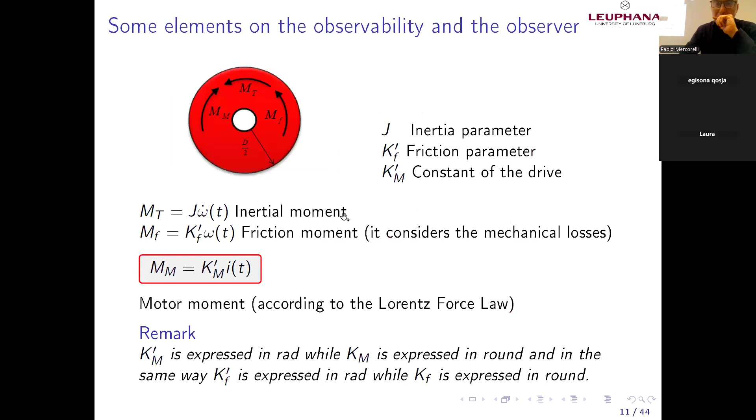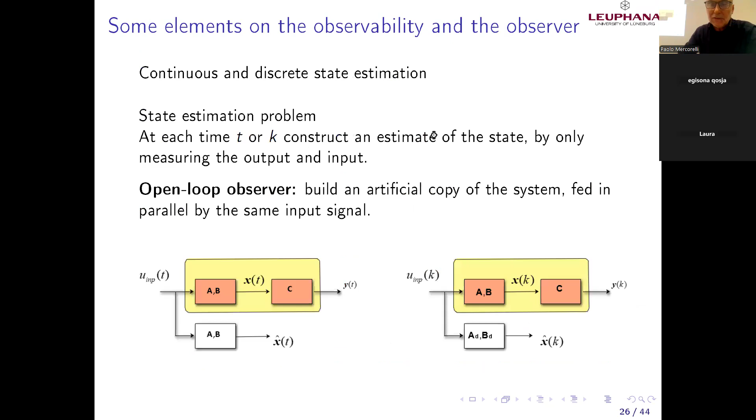Okay, until now basically we have seen many things: observability, observer, and we applied in a practical way, I would like to say, or better to say we implemented an interesting observer, which is, let me say, the first attempt to implement the observation using an observer. The name is Luenberger observer. Luenberger is an emeritus professor in LA, Los Angeles. I think he's still there.

Do you remember I told you these mathematical issues are not extremely important in this course, but I try to give you more feeling in order to understand at least what MATLAB does. Just a few words about nonlinear observability. At this moment what I am telling you is really abstract. I will come back later.

If the system is nonlinear, it means again that I cannot separate causes and effects. This means that states and input, for instance, are somehow mixed together. We will see a little bit in detail when I have the possibility to do an exercise later in the context of nonlinear systems. Nevertheless, the nonlinearity aspect is important because reality very often is not so linear, and the linear model is not enough.

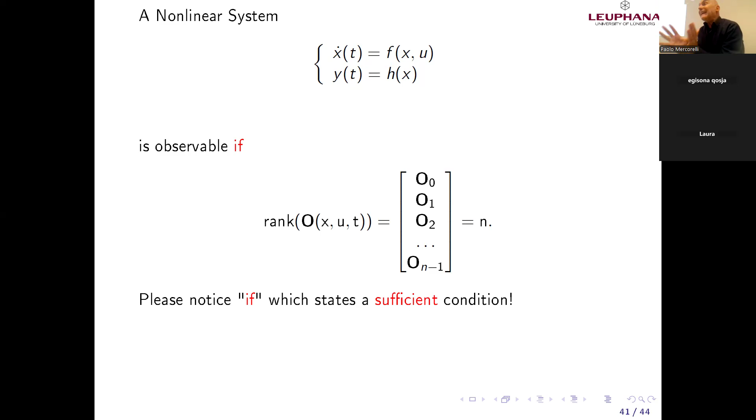But also the problem could be, now I'll show you, if the model does not reflect exactly the reality. I will be a little bit more concrete on this point using, again, an equation very shortly. Do you remember here? I was able, and now I will repeat again, to obtain this equation here, which is the error dynamics between what? Do you remember? X minus x hat is the error between what is true and what I estimate. This is the error dynamics because it's how the error changes, the derivative of the error, as a function of an expression.

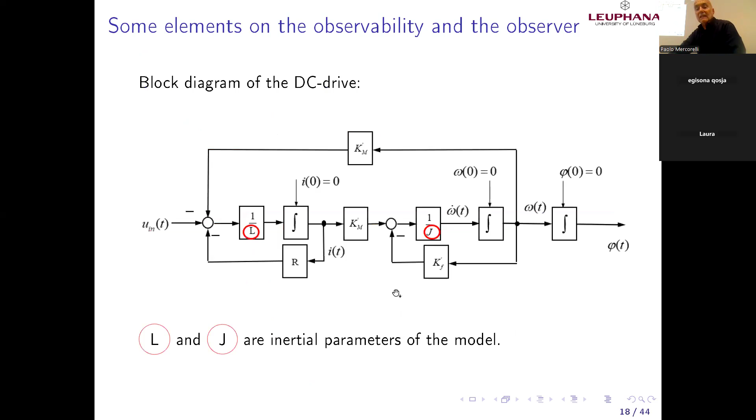But the assumption here is that the representation of my model using A, B, and C, but in particular using A and B, is perfect. I mean, I use the same A and B for the observer, which is this one, and for the system. But of course, this is an assumption. If you remember the simple example which I presented, the motor, for the engineer it is clear. I assume that the matrix A is perfectly known. This means I know the resistance of the coil, I know the inductance of the coil. This is not necessarily valid as an assumption because it's difficult to estimate or to know parameters.

This example here could also be used to understand what I intend. You remember, I built this with MATLAB. Now I open MATLAB to repeat. I assumed in the simulation I show you now that -1, which is the true value of the system I am considering, is exactly -1 also in the model. But it could also be -1.1, -1.2, because what I write in the computer to describe the reality does not necessarily reflect exactly the reality. Now, these two hypotheses, no uncertainty in the measurements, and that I know perfectly the parameters, roughly speaking the model, are not necessarily valid.

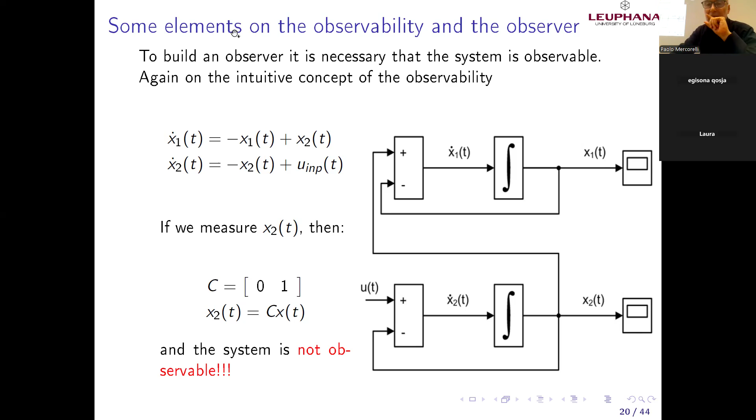Let me open again Luenberger in order to introduce Kalman, what Kalman can do for us, because last time I implemented the noise. Okay, let me open MATLAB. I cannot do that. Let me see if I'm able to open MATLAB from here.

From here, I'm sure. Yeah. Then I will share. 1 second. It should appear. Yeah. I think I have to share. No, no, this is not. Where is MATLAB? Ah, okay, excuse me. I didn't see. 1 second again. Yeah, okay. I think you should see the MATLAB. What is this? This is different. Something related to our project. 1 second. I look for the folder. Yeah, again for MATLAB.

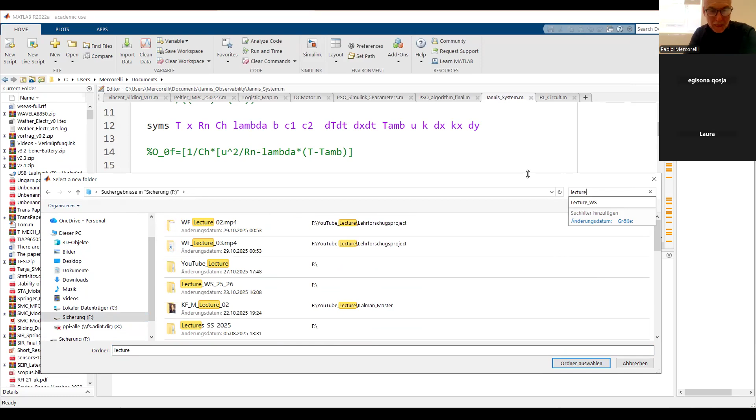We have the path, because the MATLAB I have here is basically a window of MATLAB. Here we can see the path where we are. Probably you know that from Windows. Now I'm looking for the folder where I have the software from last time. I don't need to explain what I am doing because this is a Windows structure. Let me see if I find it quickly. I think it should be here. Many things. But it's not here. Okay, found it.

What I would like to show you, the example was this one. Let me open. Look. Let me run. Now let me open the corresponding Simulink file. Let me repeat here the concept.

First of all, I would like to tell you again about what happened when I have noise. So we repeat what I did last time. And we can see, if you remember, that the estimation is not what we have seen without noise. This means, practically, the observer which I presented until now, this Luenberger observer, at least in this form here, could have some problems estimating a measured signal with noise.

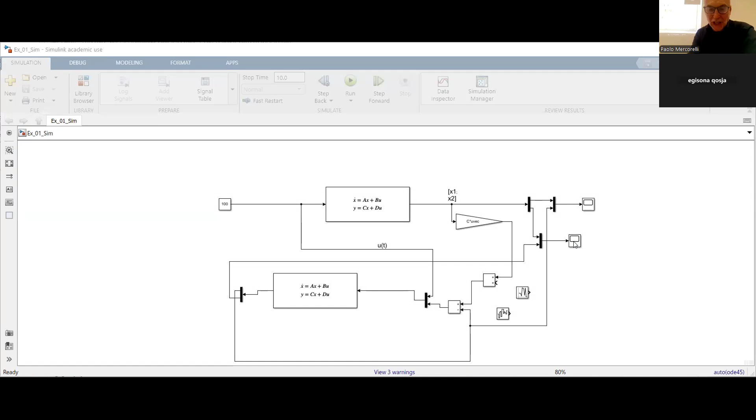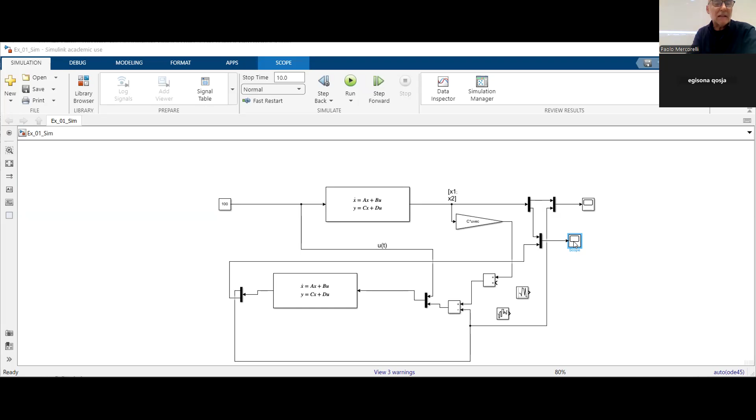Look what happens. Let me share. Okay, let me close this. Without noise, starting from different initial conditions. For instance, I would like to show you just the estimation of the second variable with the Luenberger observer. You can see, nevertheless, starting from different initial conditions,

after, as we discussed a lot, we can see that the observer is starting from 0. The real system is starting from -10. But after, I don't know, 0.6 seconds, it seems that we are quite satisfied, if we are satisfied. Again, it's an asymptotic observer. I told you about that.

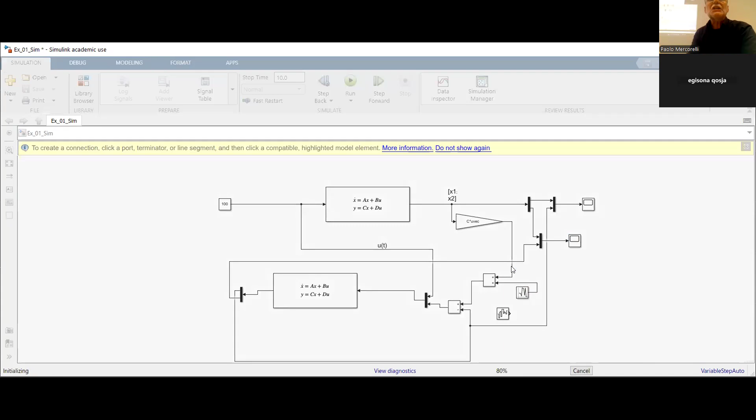Now, if I have noise in the measurements, where we concluded last time, look what happens. Noise means the measured data does not reflect the reality. Meaning, the signal here, which is the measured data, is not the true data.

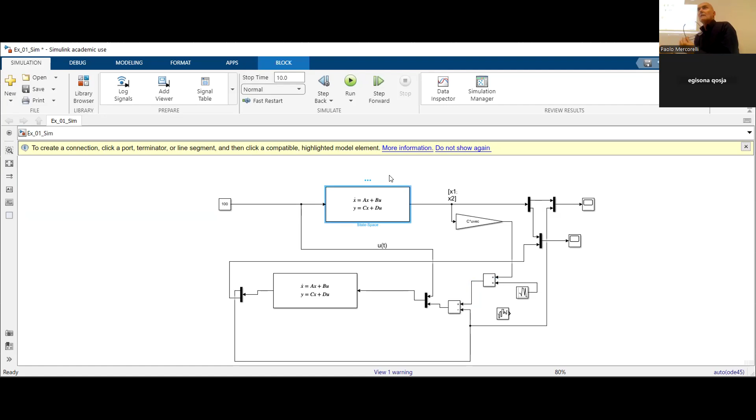Again, this is a very important concept. This is the real system, characterized by the matrix -1, 1, 0, -1, something like that. And here the observer. I can manipulate this as I want, but I cannot change this. I mean, I can simulate, try to imagine what happens using my physical knowledge, or an expert in, I don't know, population dynamics, because I'm not an expert in population dynamics. I'm not an expert in economy. I'm not an expert in sustainability.

Katharina Benz, if you look, Katharina, did you check Katharina Benz? No, don't do that, but you can.

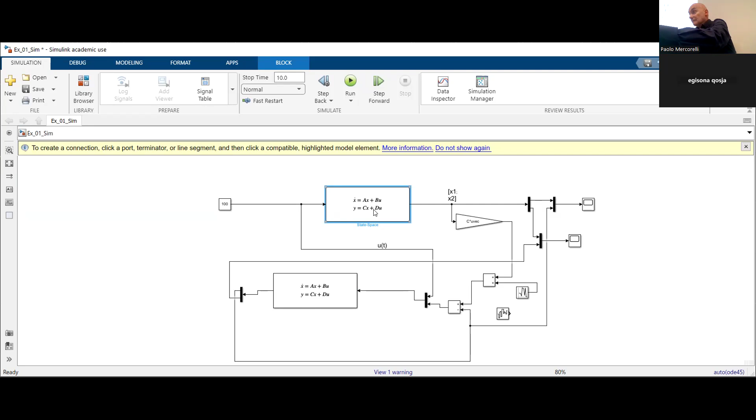Katharina Benz gave me the model, because she was an expert in the model of this dynamic between fish and fishers. Also, the two students in data science who were experts in internet data gave me the model. And then once I have the model, I can try to build an observer. But this is given. Even the people who are experts cannot say this is the truth. This is the model, at least in the simulation. The truth is not possible to know. And this is the point which I would like to emphasize.

Look now, if the measurements, the data, are affected by error, independently of whether I know the model or the system, better to say. The model reflects the real system. Look, of course, we can see that the estimation could be better. We will see that the Kalman filter can try to manage this problem. Of course, we can try different variations of the Luenberger observer, but the Kalman filter, if you want, is a variation of the Luenberger observer. We will see.

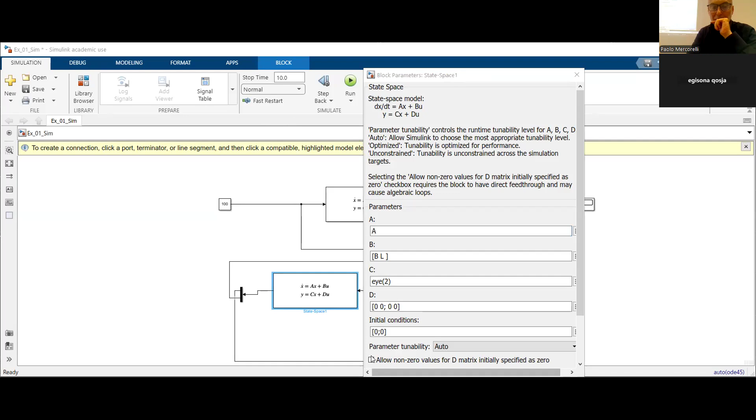Now, what happens if the model, which should reflect the real system, is not exactly known? Now we can understand this concept. Let me come back. Let me share, in order to show you what happens if, for instance, the matrix B with its parameters inside is different. Here the matrix B was, I think, 0, 1. Let me see quickly. The matrix B, look, 0, 1. Do you agree? The matrix B was 0, 1.

We can understand, for instance, if you consider the motor, the matrix B, which in this case is 0, 1, in the motor was 1 divided by L, 0. Do you remember? This means if I don't know L exactly, B of the observer is not B of the system. Now, coming back to this example, B of the observer could be, instead of 0, 1, let me exaggerate, 7, just to show you what happens. Of course, if it's close, we nevertheless have a difference, but it's not so big. But anyway, a difference, a bias.

We will see what the meaning of the bias is. This means I have an error in the data. It could happen. Not in the measured data, in the model. Instead of an inductance L of 1 millihenry in our model, we have 2 millihenry or 7 millihenry.

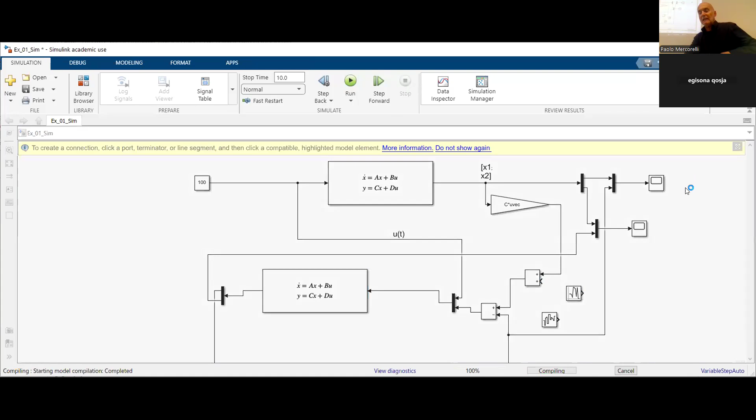Now here inside, we have a mismatch in the model. Not only, we have also noise here, but let me make more evident what happens if we have an error in the model. This means without error in the data, in the measured data. Let me see if it's evident what happens.

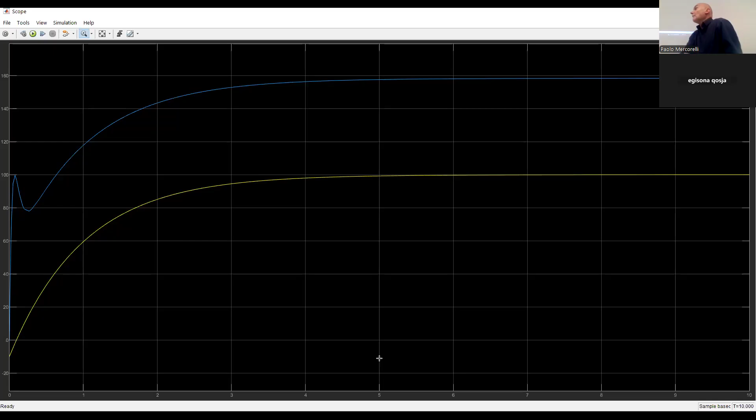Look. Now, of course, I exaggerate with 7, but just to show you that it could happen. Of course, if I write an error of 10%, it tells even a bias. Bias means, you know the word bias. We can see that the estimation now is absolutely not acceptable.

Because the real, the true, I can speak about the true. In the simulation, I can speak about the true, because I know what is, because I create the real model. This is important. In this sense, we can speak about the true and we validate, because this block here I create by myself. This means I know what is the truth.

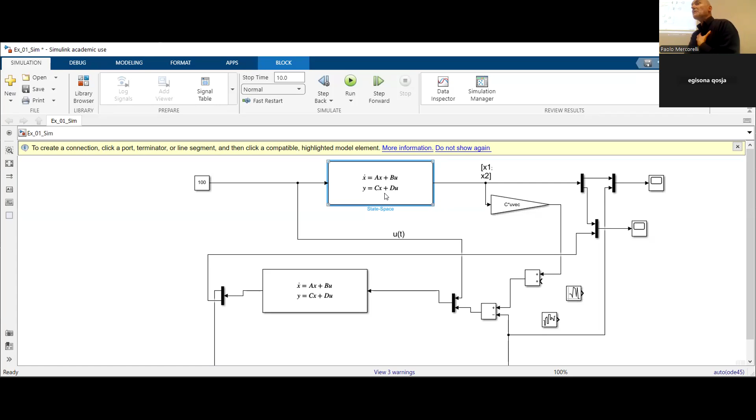Of course, in the real case, then this element here will disappear because I have to consider really the motor, the real motor. Of course, in the engineering fields, we need some element to interface the observer, which is in the microcontroller, with the real system. But this is for the engineer. In the bank, the real system very often is given directly by data, but in any case can be also modeled. But of course, in any case, you have always a mismatch between what is and what we imagine that is.

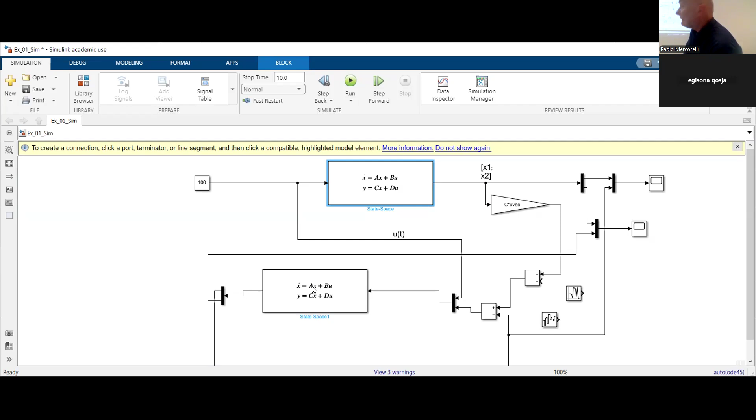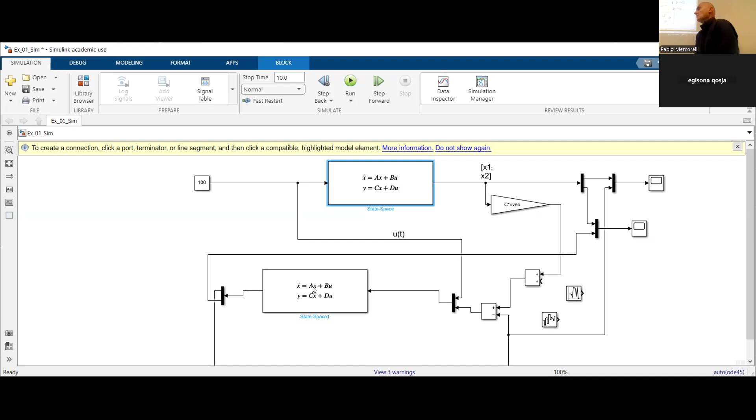Let me see if I can spend some words more about that. We can see that if I have an error, of course, if the error is small, we have a small bias, but the bias is there. I will converge asymptotically to a value which really is not the true value. If I don't have errors, I will converge, of course, asymptotically, but to the true values. If I add also this, of course, now we have some problems. More. Because you have bias and also the noise.

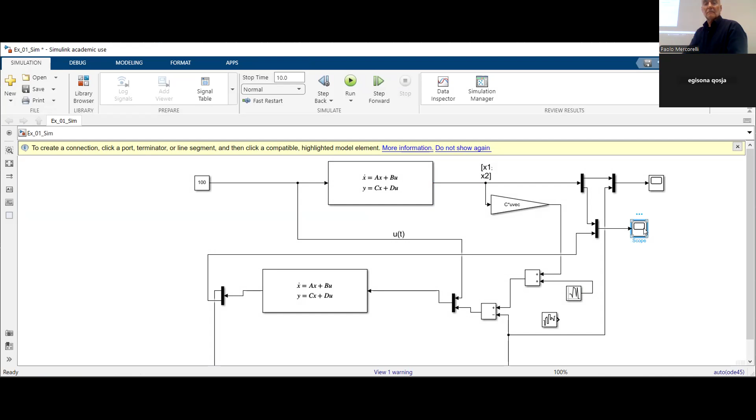Okay, now I will open the file of today. And we will see using MATLAB, not today, but next week, how thanks to the Kalman filter we can manage, can try to find a compromise, and can try to obtain an acceptable solution. Okay, let me open the presentation which I uploaded today.

Is it okay? This velocity of the lecture is a little bit better, no? Also, the repetition is worthwhile sometimes, no? Because last time was far away, 1 week ago and so on. I will be slowly also more precise on some concepts, I hope. I would like to suggest to redo at home if you have time the simulation, to play with values, with some concepts.

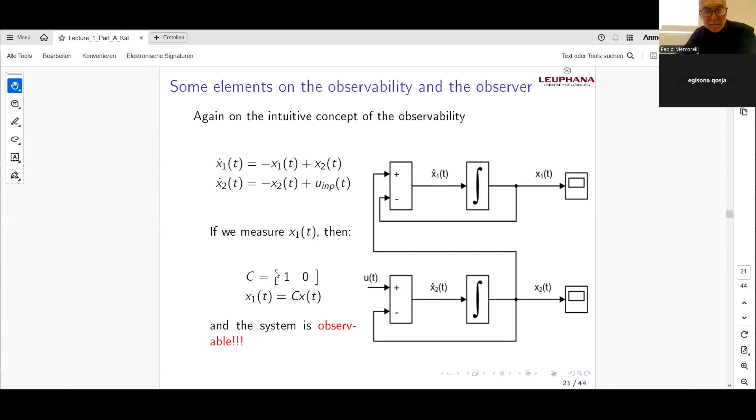Now, linear, yeah, thank you for the correction. Discrete. About discrete, do you remember? Until now, we have seen just one picture, one parallel to the continuous. It's not clear what it is. Of course, you have to know that I have a course in master on discrete control and identification. This means, of course, I try to give you some ideas. Really, in master, I have a course. The title is, I don't know if you attended class, discrete identification control. No, I don't. No. Anyway, we have a course on discrete systems. This means it's clear it is difficult to understand what I intend, but it's not necessary to understand everything, to have a feeling, because the idea is to implement with the help of MATLAB.

Linear, we have a little bit an idea. Discrete, we will see. Kalman filter is exactly the kernel of our topic. Again, as in a state observer. Exactly what I told you at the end of the simulation. I tried to give you some hints and why the Kalman filter is useful for us. Here we have some literature. I already told you about this. I think next week you can also download this introduction and try to read, even though sometimes it's not so easy. I mean, the lecture is enough to understand, in my opinion. But anyway, it's important also to have a reference at least.

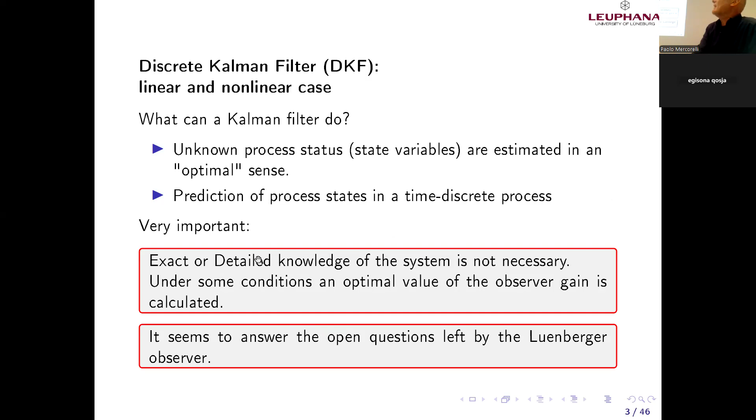We can see here, nevertheless, in the second sentence, prediction of process states in time discrete process. We will see that the word prediction plays also an important role in the Kalman filter. And this can be done, at least in our context, using a discrete system. Look, to introduce a discrete system, we reconsider again this stupid example from my lab, the DC motor. Nevertheless, you have here a mathematical representation of the system. I think next time I will show you the bank system. If you don't like, let me conclude this. If I find it quickly, I show you the bank. Probably the bank is more intuitive. I don't know if it's easier.

Anyway, you have a mathematical expression using matrices, using vectors. This is necessary, at least in the context of MATLAB, matrix laboratory. We can also implement Kalman in different forms, but this is the most used, the easiest form, because microcontrollers work very directly, I would like to say, with vectors and matrices. Anyway, I already told you about this. I measured the current. It's not the example, this abstract example, x1 derivative equals minus x1 plus x2, is the motor.

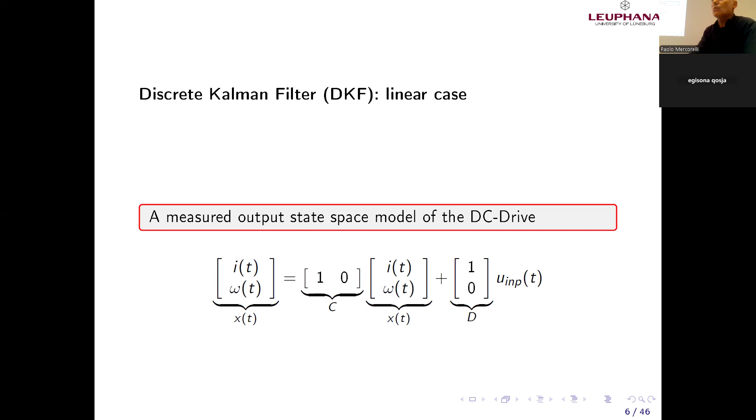Please pay attention. When we have many methods, many tools, many observers, many variations, this means no one is good. In the same case, when you are ill, I hope not, you go to the hospital and they say, we can apply this, we can apply this, we have many medicaments, or in the pharmacy. Why do we have many medicaments? It seems a little bit strange what I say, because nobody is good. In my field, I can say so. In the pharmacy, I don't want to say, just to understand. Could be an answer. But to be more precise, nobody is good because we have so many different cases. Not all are good for this case. Better to formulate this in a positive way.

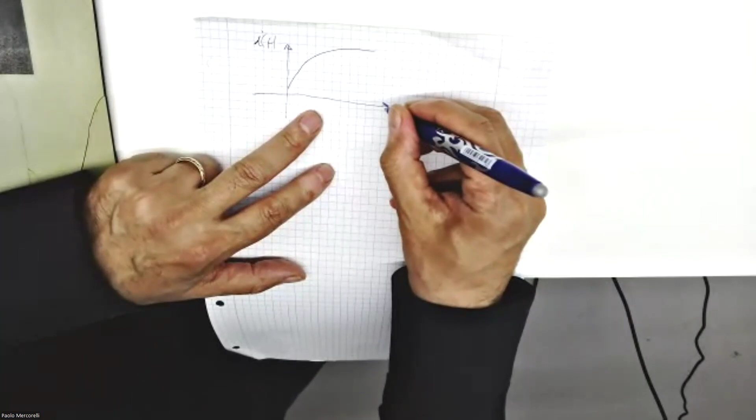Look, I have a variable, I of t. No, let's call it y of t at this moment. Could be liability, could be assets, could be anything we want as a function of time.

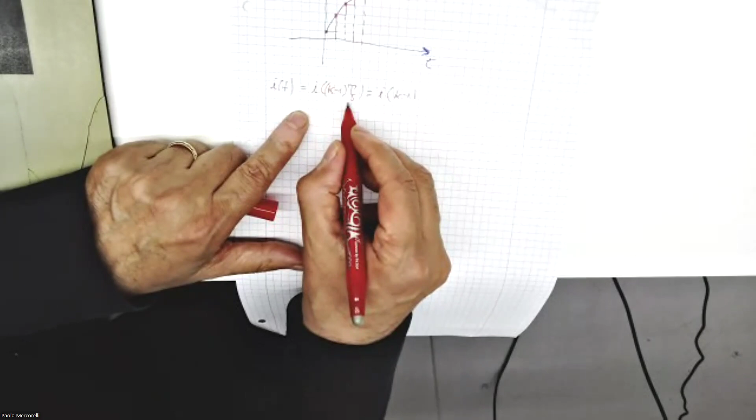Is this the idea? It's easy. Probably you have seen this. This means that I am considering for each k the actual value of the current in this case. Again, please pay attention that theoretically I will do something like that, but in the nomenclature, very often we write without Ts, but it's there, to save time, to go ahead.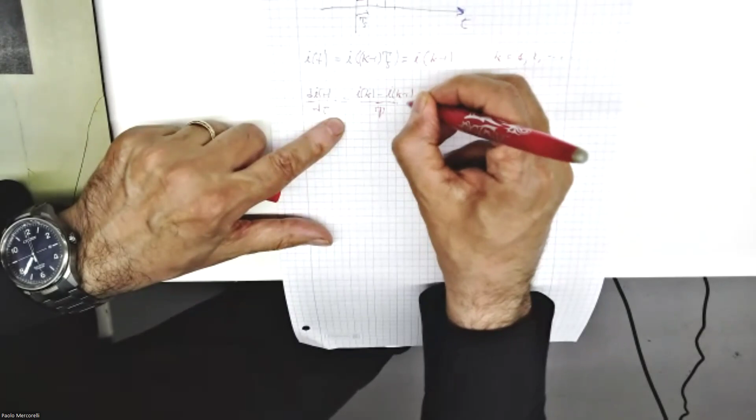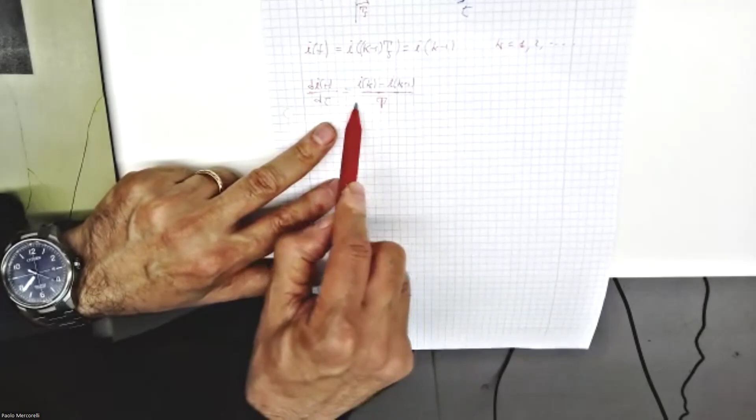Okay, let me go ahead with this, because I would like to introduce the Kalman. I have a few minutes, but I do it. We will come back, nevertheless, also look at the derivative as I introduced before. Now we know this from gymnasium. But this way here, which is the forward Euler, is just a way to approximate the function. What is this? This is the future value minus the actual value divided by Ts. We did this a lot of times in gymnasium, how we can approximate the derivative, the difference.

Now, basically, we don't have the future. In fact, in some books, we say this is the present and this is the past. But to build mathematically the model, it doesn't matter if this is the present or this is the past. But of course, we don't have the future.

Let me come back to the slide and I try to clarify future and present a little bit better. Because the idea now is to represent the model, and then we try to interpret what is the future, what is the present. Of course, we don't have the future, but we can predict. Let me show you this concept here, based on a given discretization.

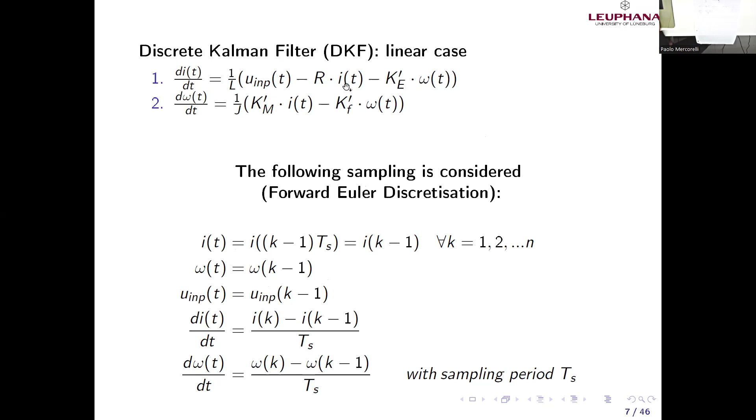Now, we understood a little bit this slide here. Now, if I plug in this position here, and the derivative in this model, believe me, you don't have to do the calculation. We had at the end this expression and this expression,

in which we can see now, independently of what I told you, present, future, that I can use this equation here and this equation here to predict what happens in terms of current, what happens in terms of velocity, given the previous value of the current, the previous value of the velocity, and the previous value of the input. The same for the velocity.

Next week, I will show you the liability of the assets. If this is the liability, I can predict what I will earn at the end of my 3 months. If TS is 3 months, we can see TS appears here in accordance with the contract which I have, considering the model which I have and what I am doing these 3 months. I will try to express it a little bit better using the liability model.

But in any case, this is the concept of the prediction, in which of course, i(k) is the future. Therefore, I told you it is the future, which depends on the present. The present is k-1. I will come back next week. Because what I did is the formal calculation. I didn't do the calculation because I cannot use the future for the calculation. I don't have the future.

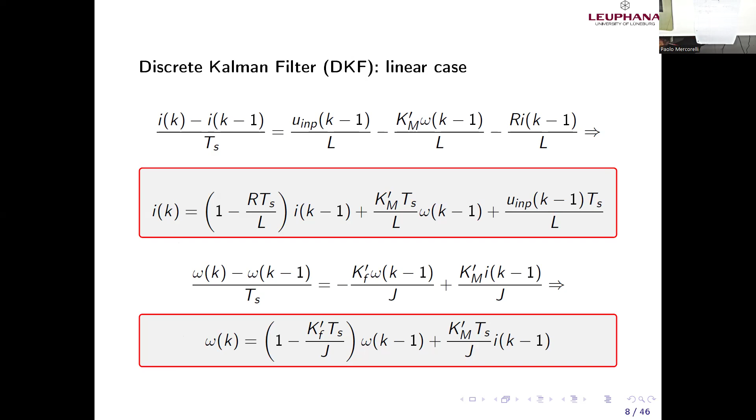Or if i(k) is the present, it depends on the past. Because if k is the present, k minus 1 is the past. You can interpret as you want. But in any case, it's a prediction model. Do you remember the keyword prediction model? Extremely important in the Kalman filter. Important concept, observability, and in terms of TS.

If you look at this picture here, very important, if I am considering TS smaller and smaller, I have a better approximation. It's clear, no? If TS is smaller, instead of this stepwise representation, for instance, I have something like that, or something like that. If I have a half, excuse me, but you understand what I intend, here it is wrong.

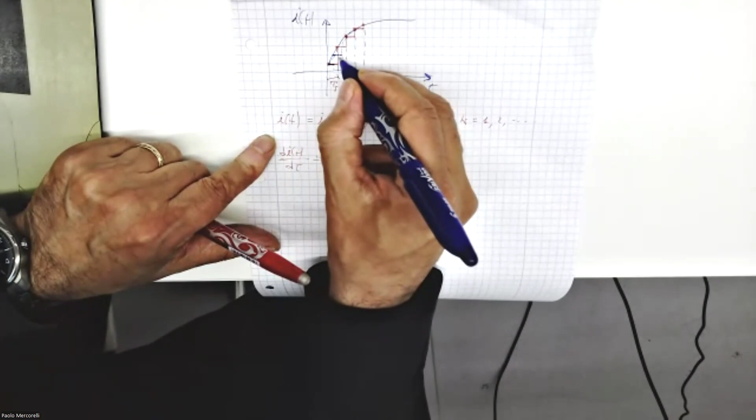Now, and so on. It's clear, if TS is smaller, you have a better representation, intuitively. Statically, it's true. This sentence is valid. But remember, I told you about observability. Observability is a dynamical concept because it's related to the differential equations.

Here we can see that if TS is very small, theoretically zero, it seems that I fit exactly the blue line. But if TS is small or zero, we have 1 here, 0 here, 0 here, 1 here. If you now test the observability of this pair, do you remember? A, C does not depend on TS. The system is not observable. It is interesting. We have a static, perfect representation, but the system is not observable. I will come back to this.

This means TS cannot be extremely small. For engineers, it's clear that it cannot be extremely large either, because if it's extremely large, the representation is very bad. This means we have an optimal TS, between something which is not observable and something which cannot be accepted in terms of approximation.

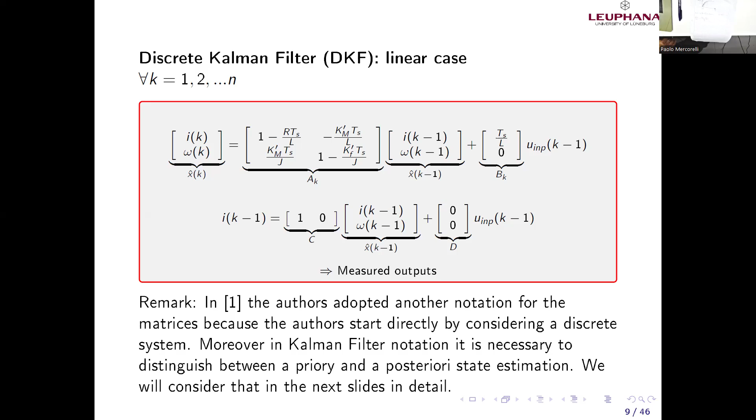Okay, I would like to stop here. Next week we will see general discretization. I will also tell you a little about backward Euler, to show you that different discretizations exist. Matlab will be useful for us because we don't do it by hand. Just try to get the concept, and then we will start with the Kalman. Now I will conclude with this.

Kalman: we will use discrete matrices, which I rename here with A and B again, but they are discrete. We can see here A equals AK, B equals BK, because AK and BK were exactly what I used here in discrete terms. One sentence. We can see that the structure of the Kalman considers a new vector variable: system noise.

System noise. Do you remember, at the beginning I told you, Sarah, not perfect knowledge of the system, not perfect knowledge of the measurements, without distinguishing at the beginning. Now we will distinguish what I don't know in terms of the system and what I don't know in terms of measurements. We will see that the Kalman filter is more structured.